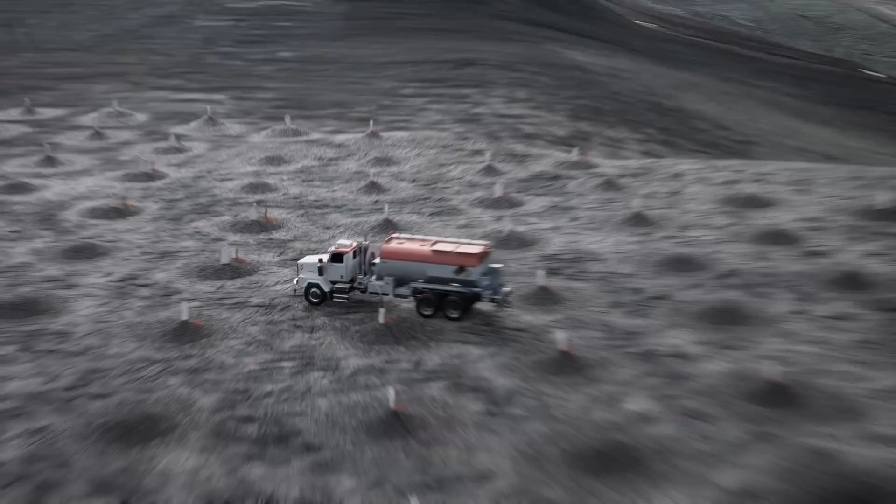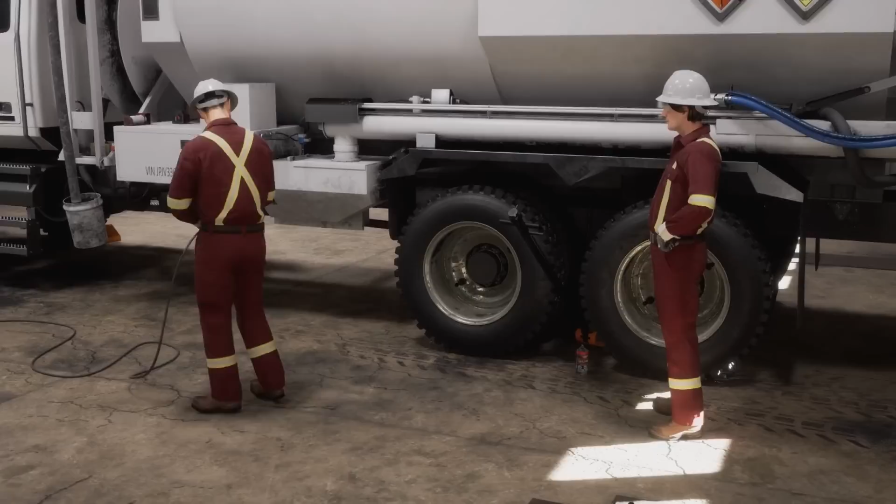Activities related to blasting preparation, loading, and execution are contracted to an expert external provider. On the day of the incident, a blasting truck had a flat tire in the mine and was brought into the contractor's maintenance shop for repair. A mechanic and his supervisor commenced the task of changing a medium-duty wheel assembly on the truck.

The flat tire was on the rear of the truck, and it was one of the inside dual tires. They proceeded to remove the good tire in order to access the flat tire behind it. Then they removed the flat tire and placed it aside. The supervisor went to the lunchroom and asked the mechanic to join him and resume the task after their break.

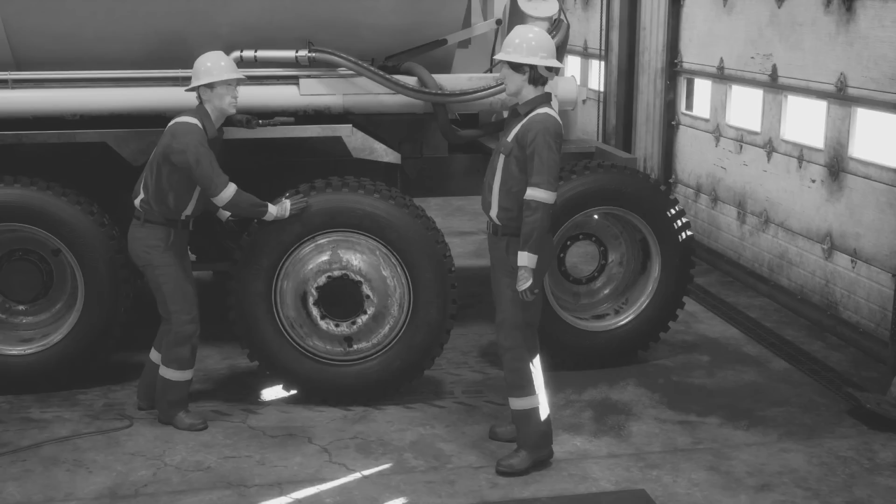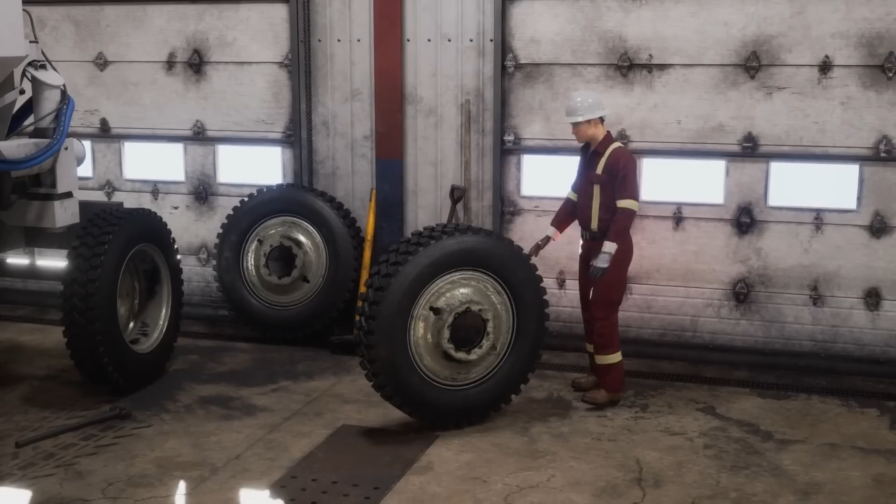The mechanic decided to continue working for a little longer. The mechanic proceeded to prepare for the installation of the new tire. He used a tire that had been dropped off by an external tire supplier the week before. Once the flat wheel assembly was off, he rolled the new wheel assembly over to the truck.

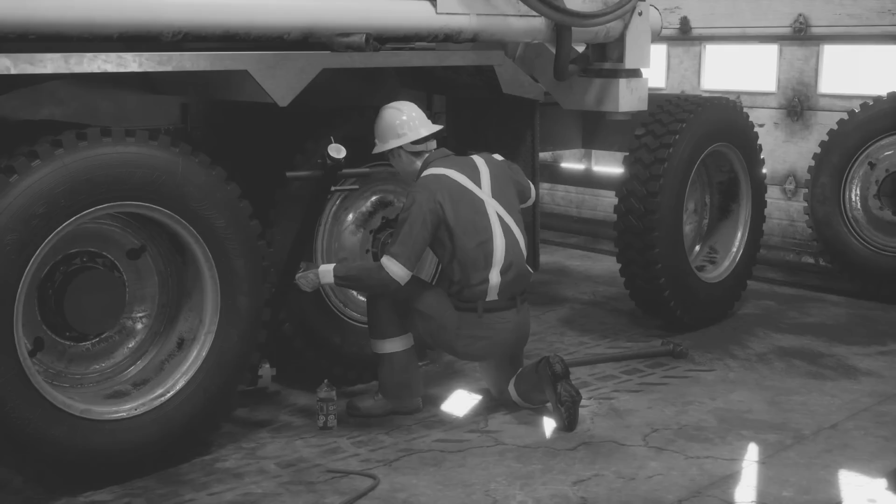We don't have direct evidence of exactly what was being done at the time of the incident, but given the available evidence, the most credible scenario is that the mechanic was in the process of levering the new wheel assembly into position by using a sledgehammer.

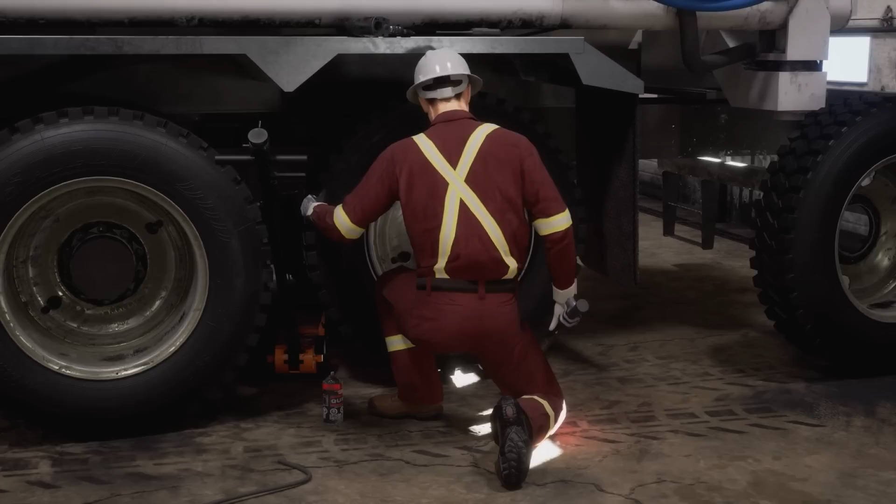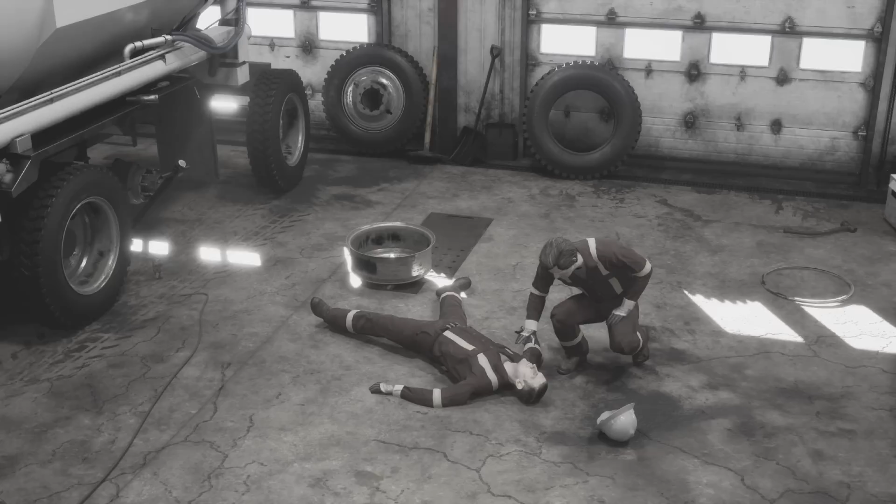After heating his meal in the lunchroom, the supervisor heard a large explosion. He rushed out to the workshop to see what happened. The supervisor found the mechanic lying on the workshop floor, severely injured. A wheel assembly had catastrophically failed.

The supervisor called for help, and the mine rescue team was activated to respond. The fast and effective response from the mine rescue team played a significant role in preventing a fatality in this incident. The mechanic was transferred to an ambulance and airlifted to an acute care facility.

We are incredibly fortunate that the mechanic has now largely recovered from his physical injuries and is back home with his family. However, the ripples from this event will have long-lasting effects for him and his family.

Key contributing factors. A comprehensive investigation was completed after the incident, and there were many learnings. This part of the summary will explain the answers to one key question: why did the wheel assembly catastrophically fail?

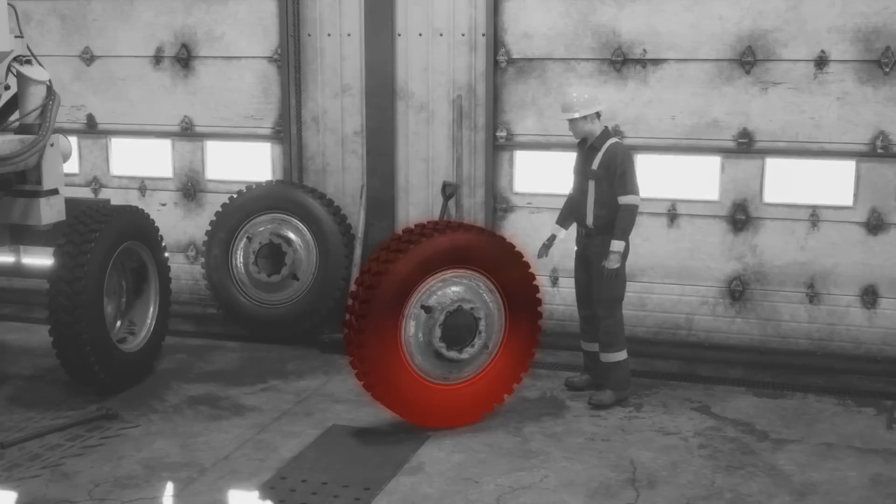The wheel assembly that had been dropped off by an external tire supplier was delivered and stored at an operating pressure of approximately 120 psi. It is believed the mechanic used a sledgehammer as a lever to put the wheel assembly in place during installation. The most credible scenario is that the wheel assembly exploded at this time. The wheel assembly was a multi-piece assembly consisting of rim base, flange ring, locking ring, and tire.

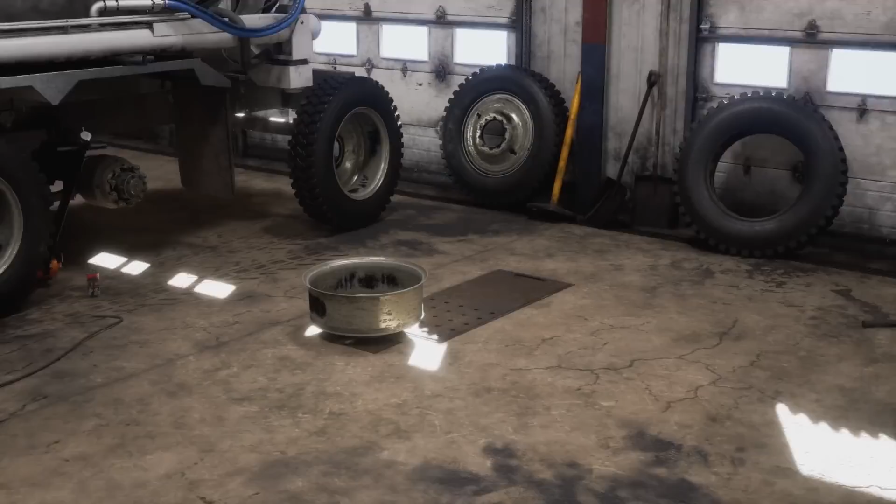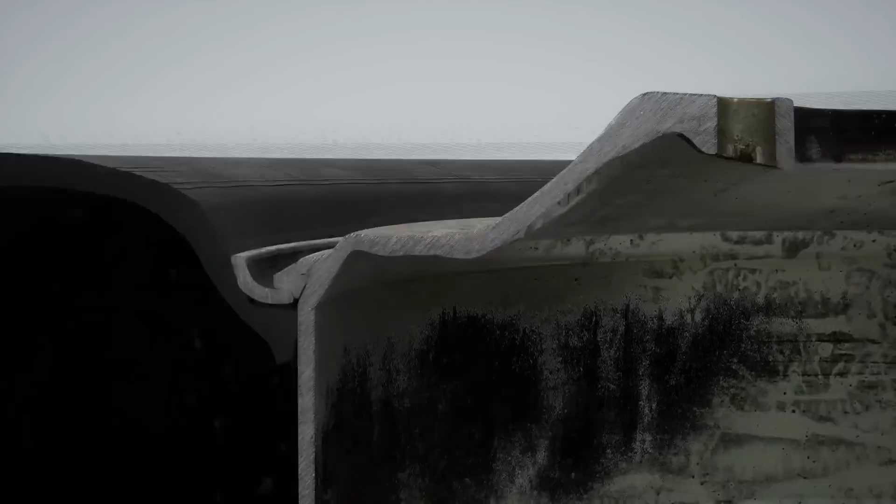A safe installation of these components requires that the locking ring be installed in the right direction to achieve proper seating of all components. Expert forensic analysis and opinion indicates that the wheel assembly had an incorrectly installed locking ring. It is likely that the ring had been installed in reverse.

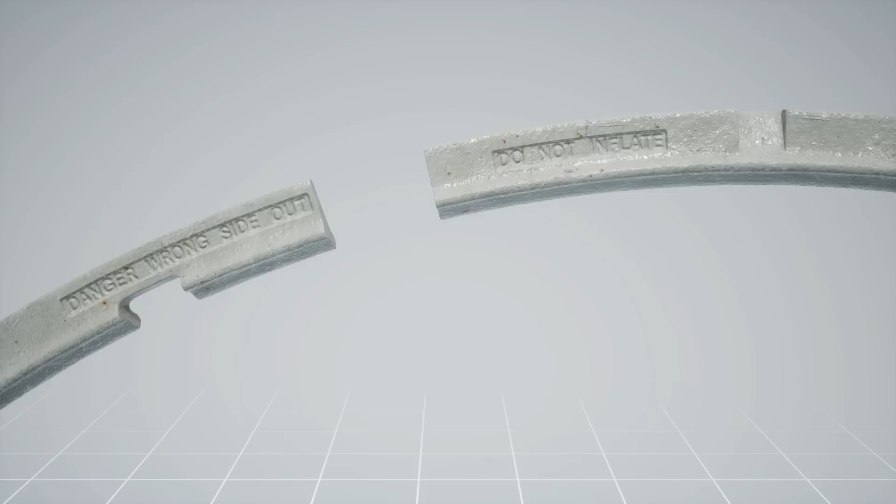During the investigation, it was identified that the locking ring had no unique identification marks that would allow the ring to match to the other components. It had no 'do not inflate' markings to help identify when a ring is installed incorrectly. The locking ring also did not have a raised tab that also helps to prevent reverse installation.

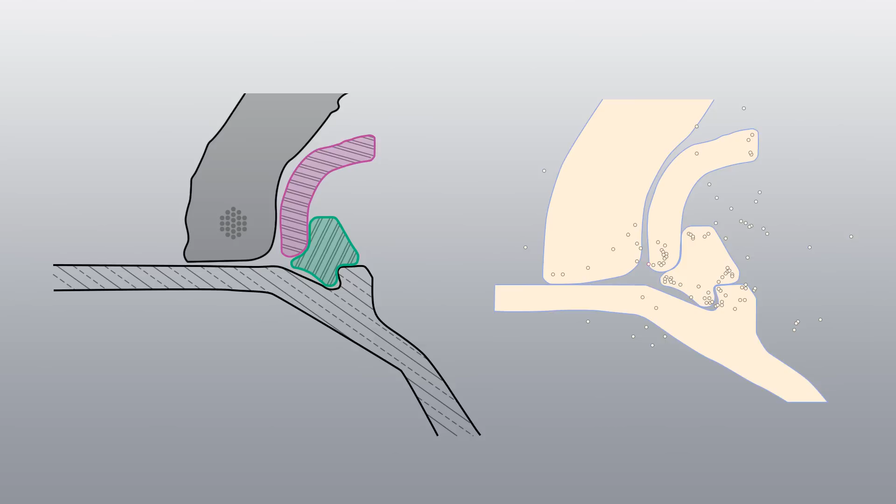All components were subjected to high-resolution digital scanning. Finite element analysis was undertaken on the wheel assembly. When the model was run on the components being installed correctly, the model was not able to reproduce a catastrophic failure when forces were applied to the tire.

When the model was repeated with the locking ring in reverse, it showed there was an ability to inflate the tire to operating pressure while the locking ring was installed backwards. It also showed that this was a very unstable situation, and the wheel assembly would catastrophically fail when forces were applied. As a result of the above, the wheel assembly catastrophically failed when the mechanic was in the process of installing.

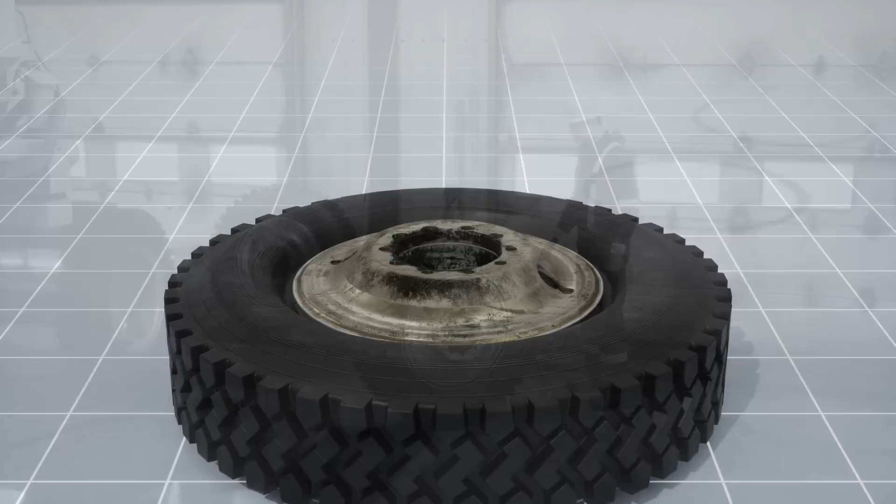Key learnings. There were many contributing factors identified during the investigation. The following are our key learnings from the investigation that we believe must be shared as much as possible, both internally and externally. The risk of handling multi-piece wheel assemblies at operating pressure had not been adequately risk assessed to identify critical control requirements. There was a significant reliance on using an external third-party supplier to provide safe wheel assemblies.

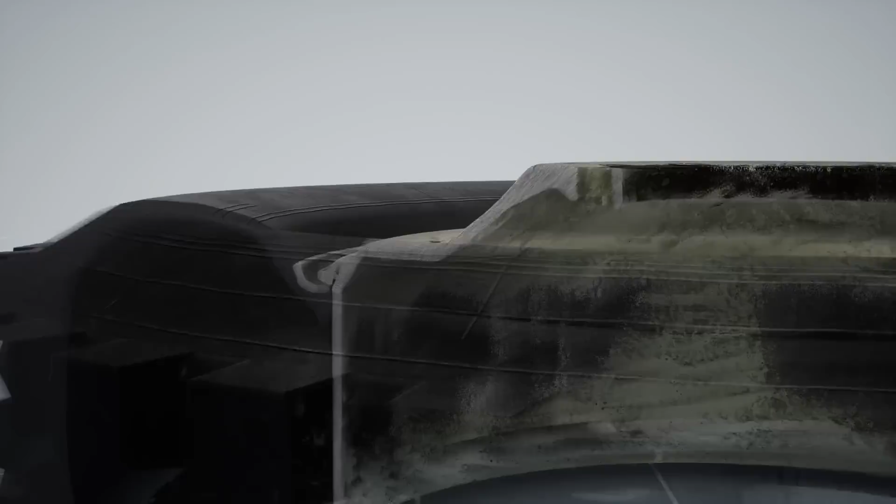Following the incident, we have asked all parts of our business to review their current practices to ensure wheel assemblies are not transported or handled at operating pressure. Modeling showed there was an ability to inflate the tire to operating pressure with the locking ring installed backwards.

Locking rings must have a means to prevent reverse installation. This could be in the form of warnings stamped into the ring or raised tabs in the ring that make it difficult to install backwards. Given that the locking ring in the incident had no unique identification stamped on it, it should have been removed from service and destroyed.

There were other contributing factors identified during the incident investigation. However, we believe that sharing the ones highlighted in this video will go a long way towards preventing similar incidents in our company and across our industry.

In summary, if your team works with multi-piece tire assemblies, please take an opportunity to review your current practices. One: Do not transport and handle wheel assemblies at operating pressure. Work with your tire providers to have them deliver safe tires. Two: All multi-piece wheel assembly components must be uniquely identifiable in order to be matched. If they can't be matched, remove them from service. Three: Locking rings should have a means to prevent reverse installation via warning markings and/or raised tabs.